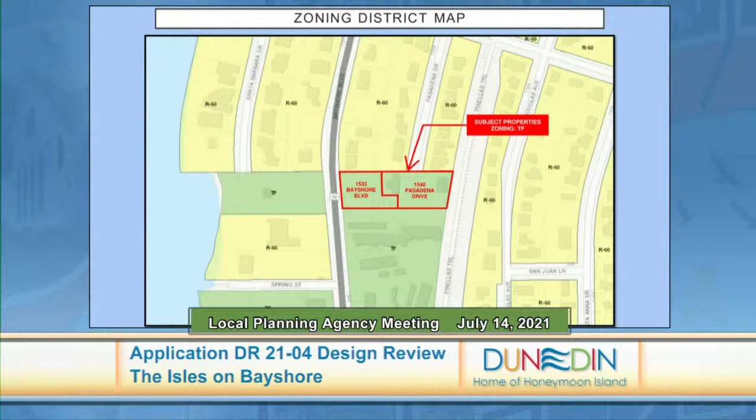I'll draw your attention to number 2, connectivity. When you look at new urbanism, you're typically looking at the connectivity with the surrounding properties. While this property does have access—you can get in from both Bayshore and Pasadena—there's no public access through it. It's going to be gated entrances. That's an unusual concept that isn't typically a tenet of new urbanism.

Some of the items listed are not necessarily relevant, such as mixed use and diversity, because the property doesn't support mixed use. The land use zoning doesn't support it, so you wouldn't typically see a mixed use scenario here. But you do have a mix of uses around the property.

The other area I'd draw attention to is the 5th tenet, quality architecture and urban design—how you've designed something to function with its surrounding area. While I think the design itself is good from a staff perspective, we believe there are some elements within the site that are lacking. The building facade facing Bayshore Boulevard really offers no meaningful interaction with the right-of-way, and that's what you're typically looking for with new urbanism.

You pull things up to the street to have interaction, to have connectivity—that's probably the best way to say it. In this instance, you've got a building pulled very close with very little interaction with the right-of-way. More importantly, you've got a fence and sort of a delineator there at the public edge. So you really don't have the interaction you'd want from an urban design standpoint to support the reduced setback from 25 feet to 8 feet, which is a 17-foot reduction.

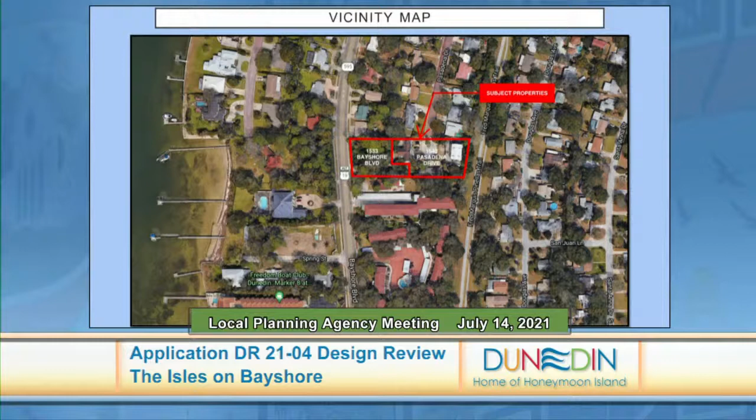So we've provided that, I provided a link, I hope each of you had a chance to take a look at that. Staff went through that, and really what we're looking at is the physical compatibility of the proposed project against the existing buildings around it and the potential for what could be developed around it. So it's really both.

Some of the things we'd be looking at are height issues, architectural features of the existing structures, historical aspects of the existing structures, natural features, existing land uses, existing residential density, and economically related uses. From a staff evaluation, the primary issues we identified with incompatibility surrounding this project had to do with the height and massing as it relates to the existing land uses around the property.

What we've done is provided you a little analysis, and we wanted to put it in an exhibit that would be helpful. So this exhibit, we looked at not just the existing uses. The first thing we looked at is, would the existing uses on the site, which would go away if the project moved forward, be considered compatible with what's going on around it? And the answer is yes.

There's basically a 2-story structure tucked in the back. There's a single-story structure along one property line, and then along the trail, there's the storage structure I mentioned. Those are all older structures except for the storage structure, which was built in the last 20 years or so, and so those would be considered compatible.

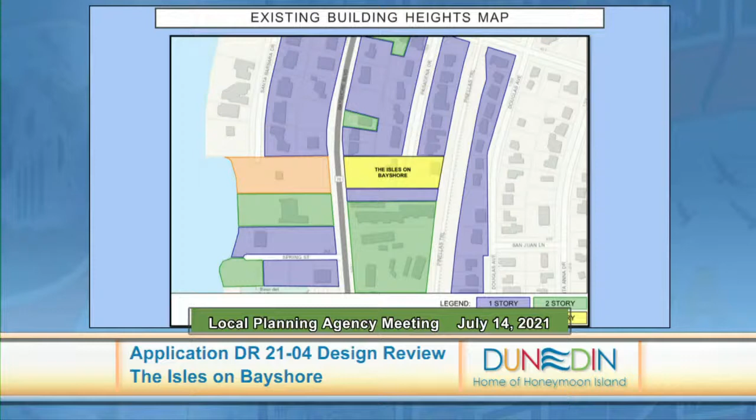The third item we looked at was the existing land use and what could essentially happen around the property when you look at compatibility. When you look at what you have on the ground, from a land use perspective, you can see you have predominantly RU all around the property, which is our Residential Urban, most compatible with our R60 district.

And then you have the RM, where you have the tourist facility over top of it. But this piece transitions very quickly to R60 to the north, to the east, and to the west. And so that dead end of the TF transitions to something that is a two-story, 27-foot maximum, that's really where you have your issues with what's on the ground versus what's being proposed.

So having said all that, and again this is articulated in greater detail in the staff report, three multifamily buildings, 4 stories in height, at very near maximum density compared to what's going on around it would be viewed as incompatible with the existing heights and residential densities, and contrary to the policies of the city's comprehensive plan, the objectives and the policies therein.

So now, I know it's a lengthy report, but I'd like to touch on the other design review criteria briefly, because these are the things you're used to seeing each month, which talks about common open space. So if I could, I'll just walk through those.

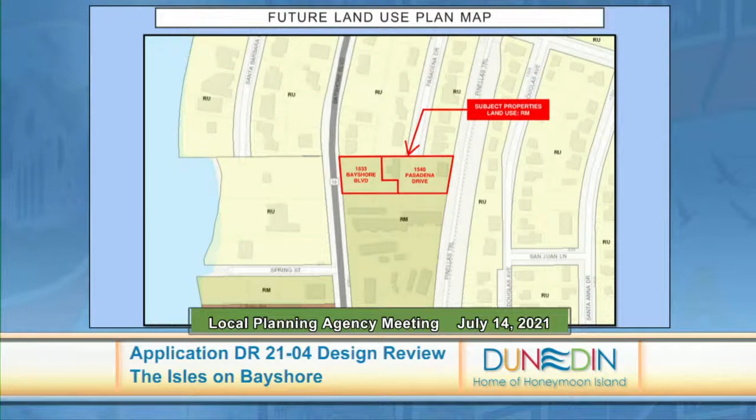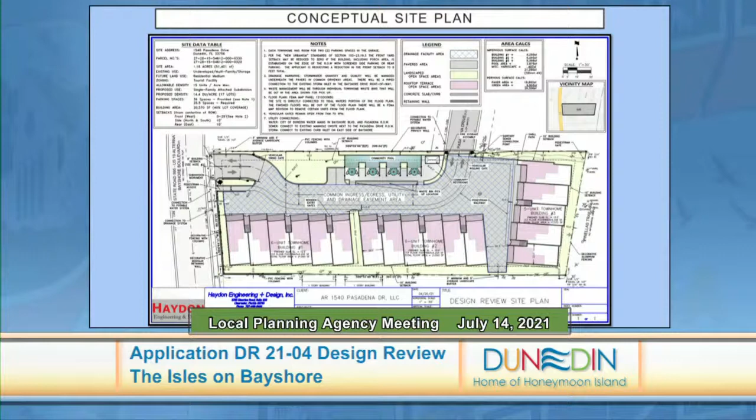From a circulation and mobility standpoint, this is purely transportation. Clearly, you enter through the site, you exit through the site, either through Pasadena or Bayshore. This is the site plan. You can see that you have an entrance off of Bayshore. Come through the site, you can either enter, it's two-way, so there's really no issue with circulation and mobility purely from moving cars.

Parking, loading, and stacking - each unit is equipped with a 2-car garage, so they've handled any parking or stacking. The off-street parking requirement, as you're used to seeing for townhomes, is 1.5 spaces per unit, and they have provided 2 per unit plus 2 by the pool area for a total of 36, so they've met that requirement.

The applicant's landscape architect will be working with the city arborist should the project go forward on any buffering or screening, both what would be required and what would be best practices for that area. Fences and walls - I mentioned earlier, the property will have a fence around the perimeter of it, including along the trail.

From an architectural style standpoint, the applicant did choose one of the 5 approved. They chose the Anglo-Caribbean, and in your backup you were provided with both the architectural renderings and the perspective renderings.

From a sustainability standpoint, as I mentioned, the applicant did submit the matrix. It was pre-development graded, if you will, by Ms. Gass, and they achieved 146 points.

Minimum 100 was required. From a sign standpoint, they're showing a sign. Obviously, they would need a permit when the time comes.

From a public art standpoint, this project does trigger a public art component. They've elected to pay into the public art fund.

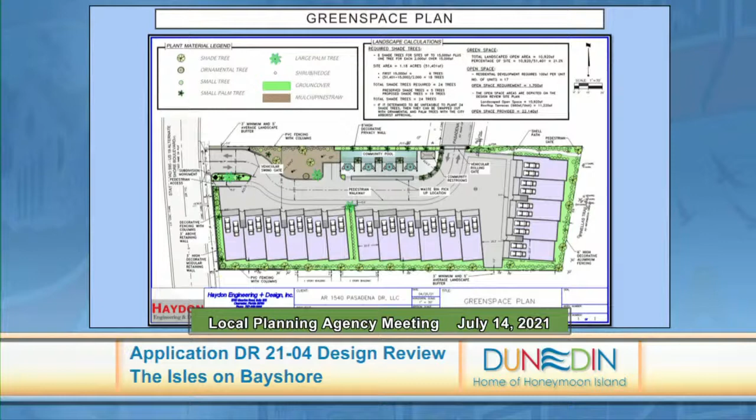So that's the basic criteria you see on the design review side. With that, staff's determination is that the application, DR 2104, for design review, is inconsistent with the applicable review criteria for physical compatibility with the surrounding environment found in Policy 01 of Objective O of the comprehensive plan. In addition, the reduced setback is also a concern, as the design currently does not warrant the reduced setback in staff's opinion. With that, I will end.

I'll obviously be available to answer any questions. Our department director, Mr. Kinney, is also available to answer any questions you may have. Thank you, Mr. DePasqua. Other questions of the board?

Mr. Massaro: I'm impressed that staff used Objective O, an item you've mentioned earlier that we've tried to talk about in the past. I'd like to see this, and I was pleased to see it within the staff review at this time for this project. I think it makes a pretty good impact, so thank you very much for covering that.

If I could, just to be clear, we've always used Objective O, but we've never seen it called out explicitly, and that's the distinction. As part of any staff level review, our comprehensive plan is a guiding document and needs to be considered. Objective O and compatibility, along with our other comprehensive plan elements, are always part of the review, which is why there's almost always a statement that the project is consistent with the comprehensive plan. In this instance, you're absolutely right, Mr. Massaro. We've been asked to extract it out and do an analysis on that particular part, and that's the difference this time.

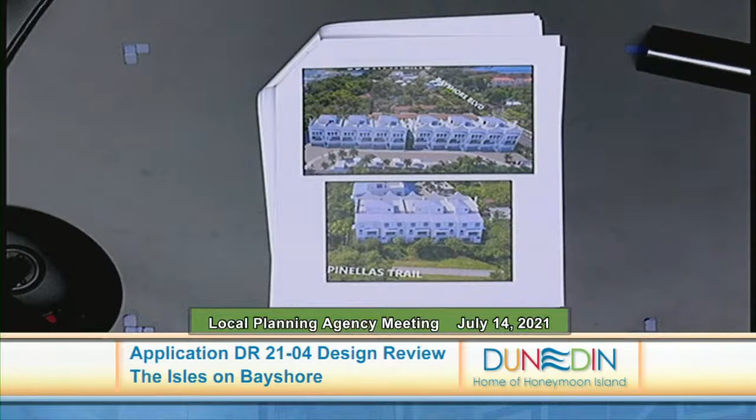We do care about Dunedin. I live in the neighborhood, Reed wants to live here. It's simply something that we really hope can be looked at with a different lens than simply developers coming in to try to build a monstrosity and make as much money as they can. That's simply not the case here. It's truly that we believe we can put something on this property that is going to be something the city of Dunedin can point at and say, look how beautiful that is, look what we have. And from there, I'll turn it over to Reed, and he'll give you a little more.

Alex, okay, if you don't mind, could you go back maybe to the second page? Sure. And this is of the current condition? Yes, that one specifically. Right where your right hand is, is that about where the entrance, if this new project were to go through, would be roughly the same point of entry into that property?

This is where the Pasadena part of the property, yes. And that would be the same with the new one? Yes, that's where it would still be laid out. The street goes directly into it. And those mailboxes belong to the people that are currently residing in those multifamily homes in there? Yes, they do.

And is that metal building, that's the first time that I've seen that, it wasn't in our staff report. Is that currently occupied? Obviously, that looks like a pretty modern building, it was introduced to us as, I believe, a shed. That's a heck of a lot more than a shed. It is being used currently as a workshop of sorts. There are boats, cars, trailers. If I had to call it what I see, it looks like a storage facility where you see just kind of old stuff sitting there.

We know the owner, he's a nice enough guy. He likes to work on cars, he likes to work on his trinkets, and this is where he does it.

Okay. I saw the owner, Nicholas, the applicant, Reed. If you don't mind me asking, I don't know why I wasn't on there. What are you? I'm Alex Contos, I'm Reed's partner. Partner, okay. Good deal. Yeah, okay, good, that's all I had, thank you.

Also wanted to kind of give you an idea what that depth is, just so you understand. It's pretty significant. So I'm going to try to get y'all to see this. So basically, we have 75 feet between the face of our unit and the edge of the home that's over here and the homes that are here.

We also are going to have significant landscaping over here, and our product is 68 feet from our property line there. That distance is wider than the width of a lot of those lots that are along there. So essentially, there's almost an additional lot sitting right there between us. And

We're going to have this area here with the pool. We have a decorative wall, we have decorative fencing, and considerable landscaping.

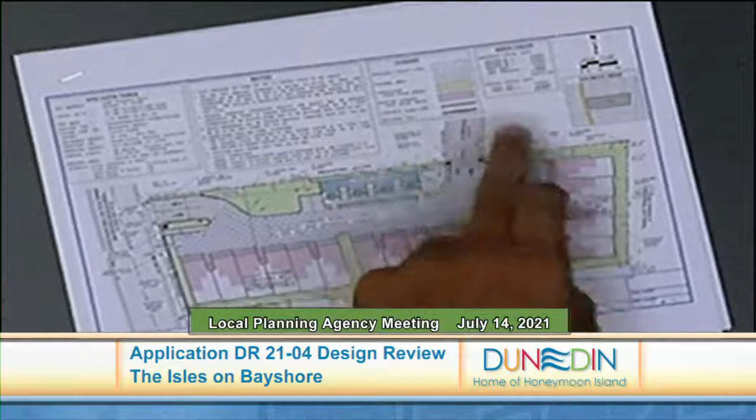As far as the density is concerned, everything in this zoning category, I believe, is only allowed to have 1 unit per lot, essentially. And that's in the R60 category here. In the tourist facility, we're allowed to have a higher density. The site to the south of us, their density, that's where the short-term rental is actually 14.44 units per acre. We're going to be 14.41 units per acre. So, based on those things, we feel we are compatible with this single-family neighborhood that we have here.

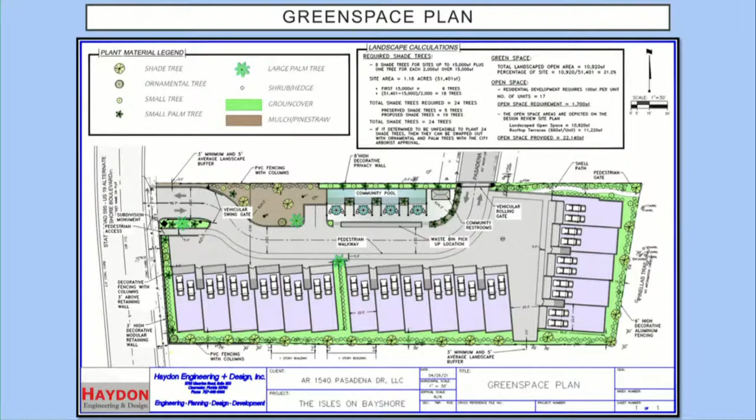Now, the Policy 01 in general is a difficult policy to navigate as an applicant. It does not have any defined geometric criteria by which we can design to. It appears to be more of an art than a science for the applicant. So the only way for us to truly determine what compatibility is, prior to having an assessment by staff, is to go out and look at what's been done, since we have no other option at that point.

So what we chose to do is look at some of the projects that have been approved in the area recently. We are here. Mira Vista, Phase 1 is here, and the Oak Bend townhomes are here. I've just pointed out on this other areas where there are 3- and 4-story product. It's a little bit scattered throughout the entire area.

Also, I want to point out that our product - Joey had an exhibit that showed our site as being 4 stories. Our site, we call our product 3 stories with a rooftop terrace. Mira Vista is 3 stories with a rooftop terrace. At least that's how it was referred to in their application and in all the staff reports and the minutes from the LPA that we reviewed.

And I just want you guys to see our product relative to theirs. So, we're actually smaller. They're 3 feet taller, our units are smaller. So I wanted to give you guys an idea of scale of our product versus Mira Vista.

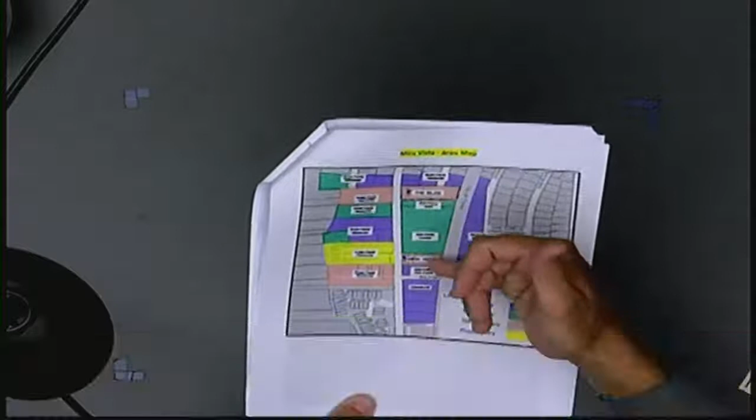Here's Mira Vista. This red color, pinkish color, represents 3-story product. You have 3-story here, 3-story here. This yellow is 4-story. That happens to be where Marker 8 is, Beso del Sol Resort. The purple color is all the 1-story that's in the area. And the green color is all the 2-story that's in the area. The 2 new units that are being built on that site to the south of us, the VRBO site, are actually 2-story.

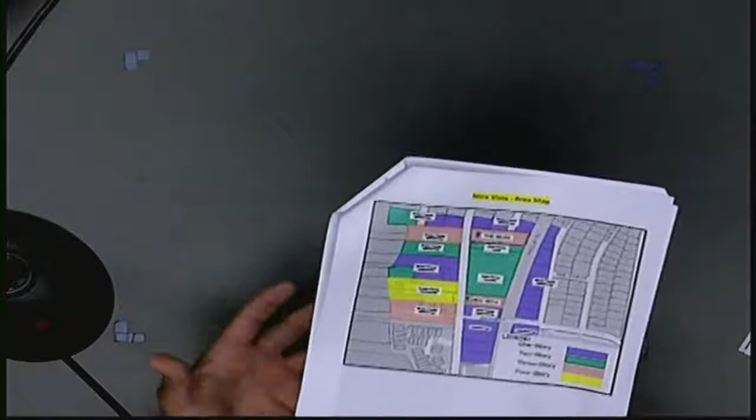So what I'm trying to display in this is that as far as compatibility of surrounding area, you have a mix of product, and where our product is very similar to where Mira Vista's is and the types of product that are around it.

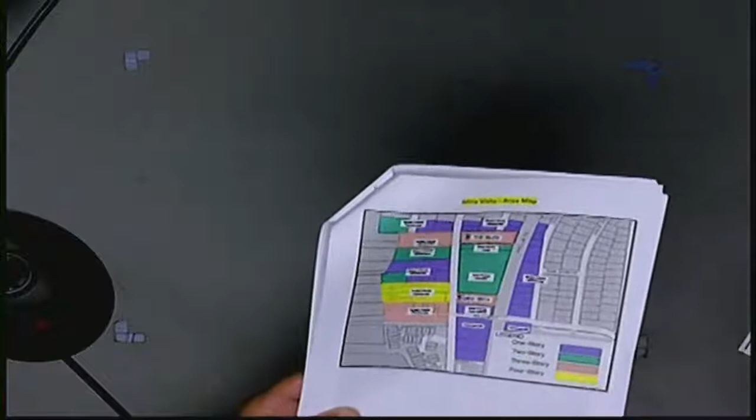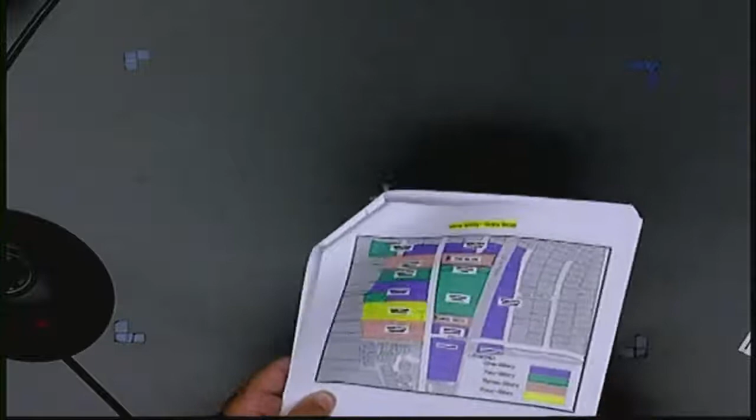So again, when we look at this and we're trying to figure out what does compatibility mean, we are looking at our adjacent area, and by what we've encountered, it was compatible.

Here's a picture of Mira Vista when it was first built next to the 1-story that was there. Here's the 2-story condos that are over there. We are actually going to be further away from the stuff to the north of us, and again, to the south of us, we have short-term rentals. So then we want to look at Oak Bend.

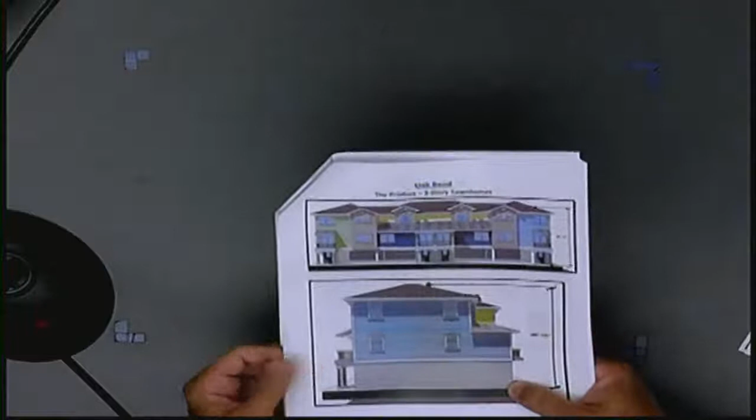Oak Bend is a 3-story townhome, a direct 3-story townhome. So as you can see, this is the product here. It's nearly 37 feet tall, so not quite as tall as us.

This is Oak Bend on Milwaukee and Main Street? That's correct. So then we have Oak Bend right here, that's where that 3-story product is. Now there is some existing 3-story right here, but all around it here in this purple, that's all 1-story.

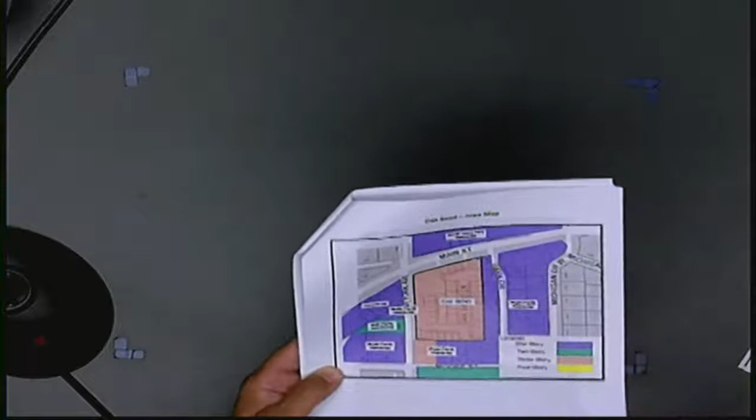That is all existing. You have a mobile home park here. This is all existing single-family homes, 1-story. You do have some 2-story multifamily over here, and there is a 2-story little 2-unit building right here. Some commercial out on Main Street, but all that purple is 1-story right up against Oak Bend's 3-story.

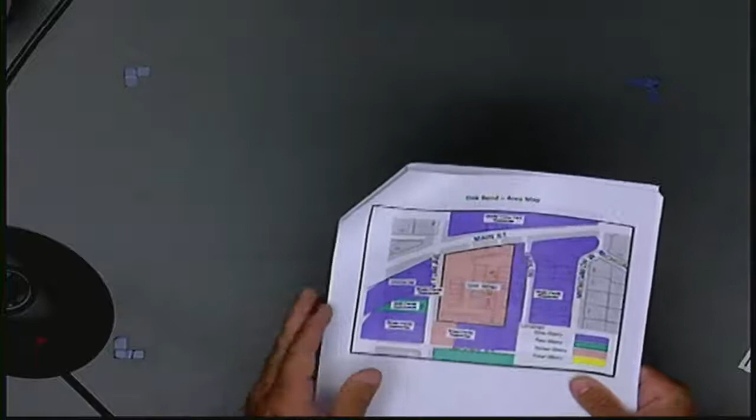It's the fact that it's all single-family residential at the end of the day. These are all fee simple owned products, and these are people that care about their neighborhood. And I don't feel that this product would be making any of the neighbors suffer. I'm anxious to hear their thoughts tonight.

And we did make an attempt, we went door to door to talk to the neighbors in the community, and we received their comments. Most of the comments were just not excited about construction. I fully understand that, nobody likes the noise. And also concern about this being a through street. We didn't really hear anything about the size of the product, the scale, and definitely nothing posed on the architectural front. So I think we are compatible, and I hope y'all see it that way too.